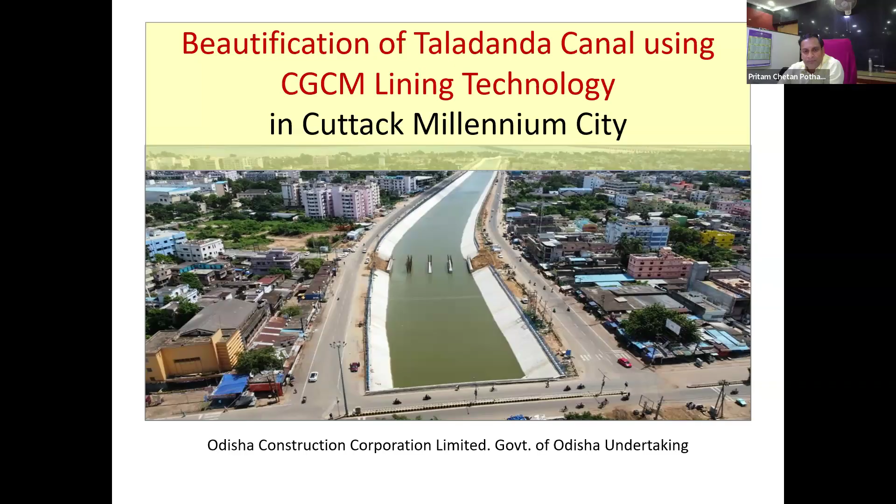First of all, Taladanda Canal. It was a very old canal constructed by the Britishers for their navigation purposes. Now navigation is no more used. So the canal is primarily used for irrigation facilities. Apart from irrigation, it gives industrial water supply to Paradip, which is located around 80 kilometers away from the Cuttack city. So all around the year, canal flow is there. So it was very tough to make a closure of the canal and construction activity in the center. So the technology's purpose was to complete the task within a record time.

Due to lack of maintenance, the old canal was filled with garbage as habitations developed in the city center, creating many hazards. The canal was looking shabby and unpleasant.

Besides, SCB government medical in Cuttack is Odisha's largest medical facility, which is adjacent to these canal sites. So all the medical waste and garbage from the city center ends up there. People have a habit of dumping into the canal.

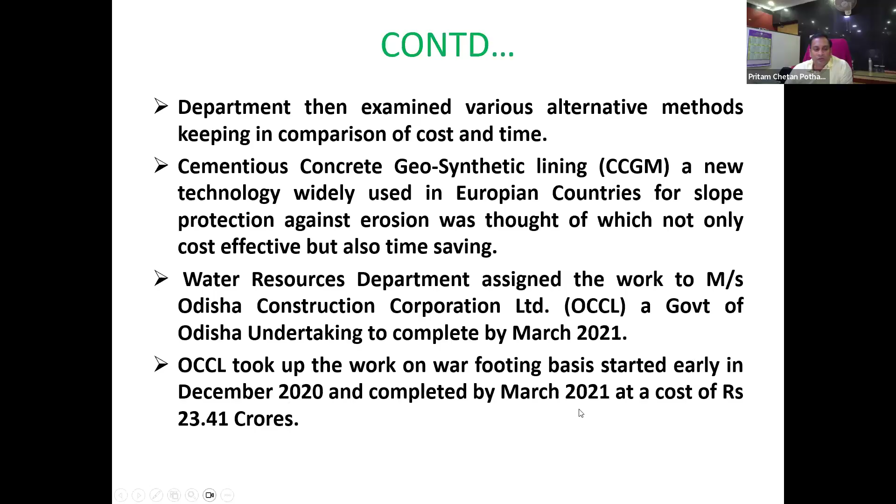Taladanda is the right canal. This is the Mahanadi river - from the Mahanadi river, the Taladanda canal originates from Jobra, Cuttack, then it goes up to Paradip, an 82 kilometer length canal.

Then we started the work - first, cleaning through multitasking efforts, because district administration also gave us full support. All the pipelines connected to the canal needed to be diverted - we had to divert the municipality waste pipelines.

We constructed some parallel drains along the canal side, then we closed all the pipes directly entering into the sewer.

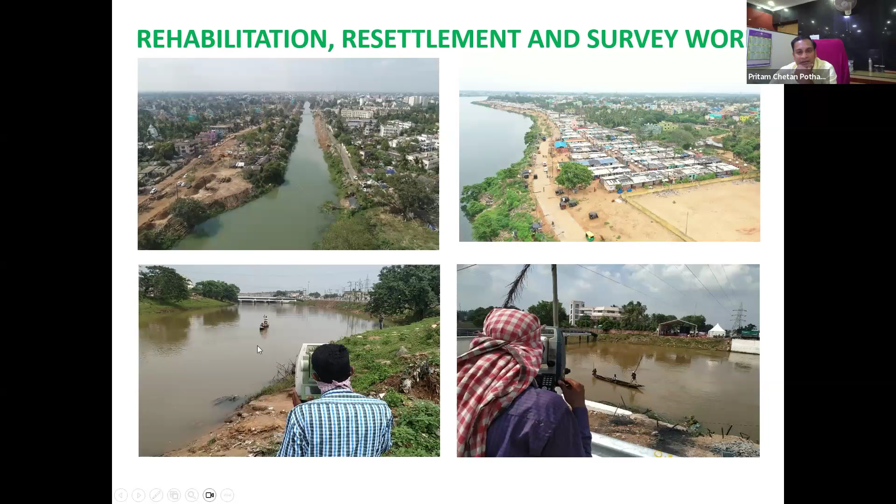I'll show afterwards. First of all, CGCM is simply a carpet of two layers of high strength woven geotextile. This is made up of polyester, internally connected at regular conjoint or intermittent filter points to release the pore water pressure.

Lining, it was why? Because CGCM is something I will show you in picture in details. This one has a regular interval. It has filter points where you can release the pore water pressure very easily, for use under hydraulic load, both longitudinal and vertical loads. It can be used in slopes as well as in beds. In both ways you can use it.

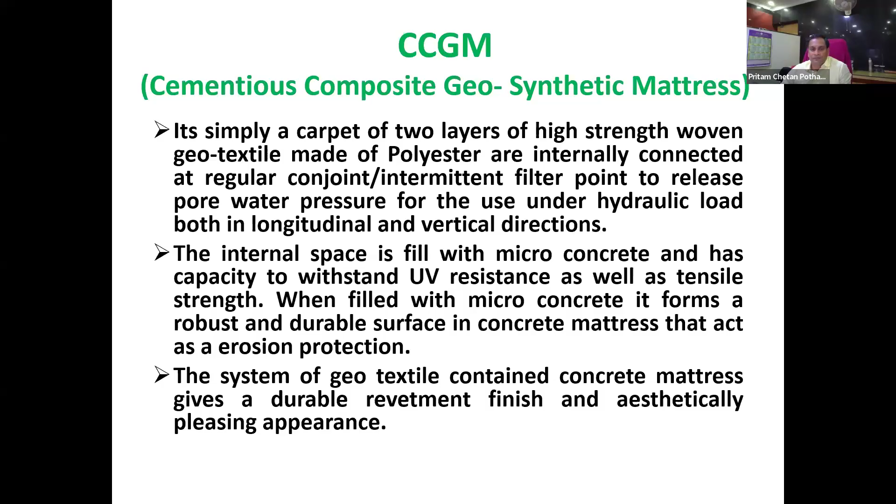So these are the technical properties. CGCM double woven layer polyester mattress, weight is 380 gram per meter square. It has tensile strength more than 50 kilonewton per meter. Pore size 200 micrometers. Average thickness after filling varies in the range of 100 mm to 120 mm.

That also we are using in the lining. Lining thickness, normal concrete thickness also we are providing up to 100 mm. So here also, thickness range varies from 100 to 120 mm depending on our requirement. Material size is available accordingly.

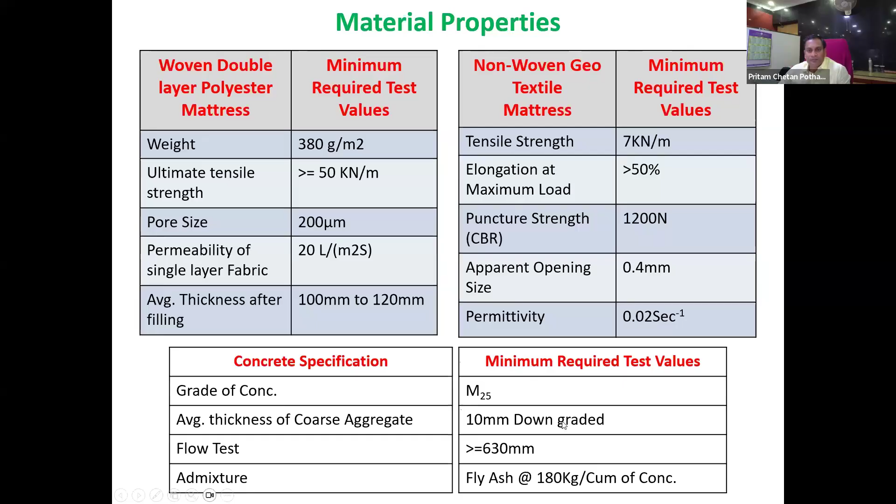Admixture we are using is fly ash as admixture. And this is the typical section, profile section. First of all, we did not take any lining work in the canal bed. We only took it in the slope portions, both sides slopes.

This is the CGCM, and this thickness varies from 100 to 120 mm thickness. Below the CGCM, we are providing 450 mm thick base preparation using sand moram admixture. This is laid over the normal slopes or slopes. Canal width is around 24 to 25 meters.

The main canal was very vast. So what we did first, we first prepared the slopes. After the slopes, we adopted sand moram admixture.

Sand moram, we took sand 60%, moram 40%, mixed that separately, and placed over the slope portion, and compacted through compact vibrator roller or compact plate. Both we used simultaneously.

This is the arc portion cutting. First we cut the section, making the profile section of the canal as per our design requirements. Then we placed sand moram admixture at 450 mm thickness. Then compacted properly using a compactor roller, slope particularly.

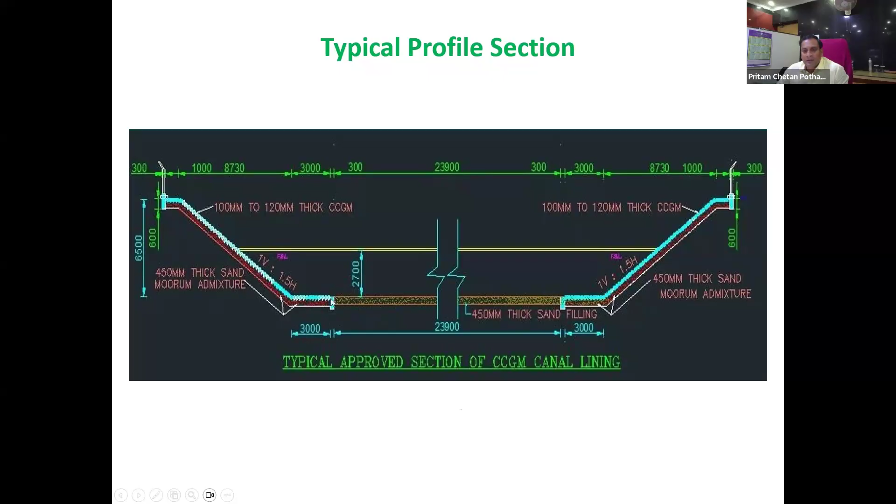We insert the CGCM on both sides of the canal, 3 meters from both sides. This is the key wall, and this is the toe wall. Both ends are fixed by concrete CC toe wall, that's why we constructed the CC toe wall.

And wherever bathing huts were required, we constructed them. These are some ancillary works we took up.

After preparation of slopes, we first applied this 150 GSM non-woven geosynthetic mattress, whose main aim is to protect the sand moram admixture, since the groundwater table is very high, by immediately applying the sand moram admixture.

We applied the non-woven geosynthetic mattress, over which we placed the woven CGCM material, because this material will not flow away. That's why we applied these 150 GSM geosynthetic materials. It is pervious material - only water will seep out, but no soil or sand particles will go away.

Over which we laid the geosynthetic CGC mattress, and we stitch it at the sides with a stitching machine as per our requirements. Both sides are pegged to hold the mattress firmly.

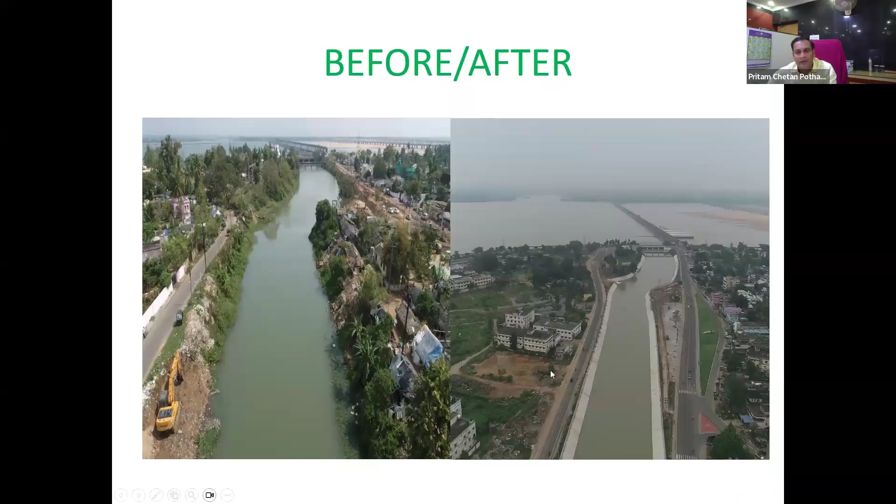This is the view before and after. Before, the canal was like this, and we made it like this, and it got huge success.

A major challenge in constructing this project was the eviction of encroachments, which was a vast task, and rehabilitating them through resettlement was also a major challenge. The second important challenge was utility shifting.

A lot of cabling in the city center was going through the underground canal banks, and shifting all these utilities was also a major task. We coordinated with all these stakeholders, and through joint mutual efforts we achieved this task.

Closing the drainage outlets of the municipality was another task, along with removal of garbage and vegetation and their disposal. As I told you, we threw away all this garbage 20 kilometers away.

The second major challenge was excessive seepage due to higher water table, since the barrage is located upstream of the canal, so the groundwater table is very high. To release the excess water pressure, we decided to use this technology, and to prevent the sliding of slopes during construction, because due to the high water table, slopes were frequently sliding.

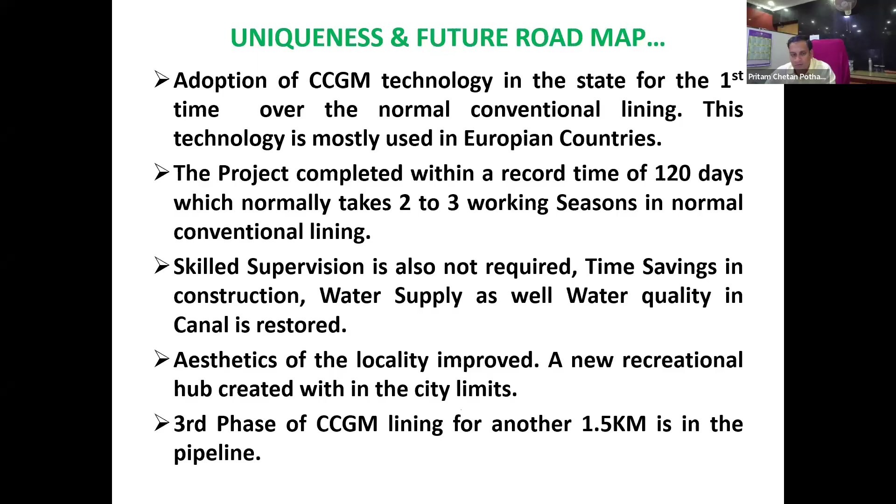This canal is just like this. So our secretary has told a very sensitive task. Even a difficult and sensitive task can be achieved by meticulous planning and stakeholders' confidence, because R&B did its job. They constructed parallel roads on both sides, 7 meter wide roads, to divert the traffic. It was a distant dream for the Cuttack users.

The canal itself we promoted for tourism, because tourism has already created a boating center in the canal. Never dreamed that in the canal one day boating will go on. That also was a success. So this is all about my topic.

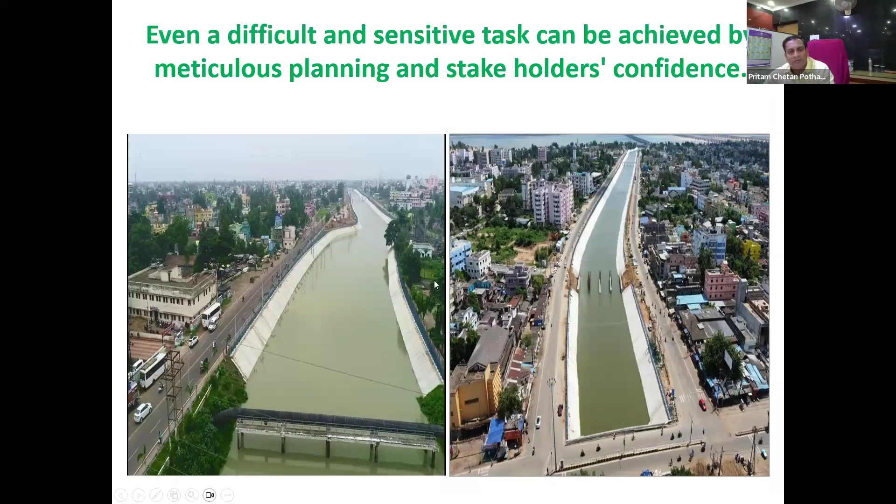I'd like to thank you. This is a small example, because normal conventional lining we are doing everywhere. With this technology you can do it in a very short span of time, and since canal closure is difficult to take all the time, this task was achieved using this technology only. Otherwise, in the normal conventional type, it would have been a much more time-taking process. I'd like to conclude. Thank you.

Any questions you can ask me, sir? Hello. Yes, yes. Hello. Yes, sir. So actually, your topic is totally completed. This is a small topic because it's a new technology, and another is your irrigation system. I think piping. Irrigation, sorry.

Now we can conduct the question session, because the session is from 6 to 7:30. So any doubts from our participants' side? This is a new topic also. They can discuss with our expert. Sir, good evening. Good evening. I am having certain questions. Can I ask right now? Yes, please.

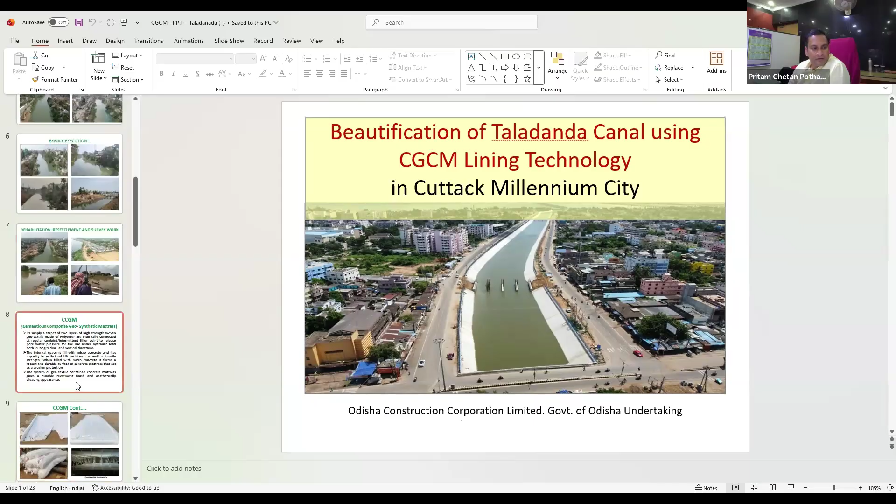You cannot compact it. Sir, what kind of super plasticizer is used in this concrete? I told you, super plasticizers. One minute. Admixture, we used fly ash. Super plasticizers as per the requirements, because we set up the plant near the side of the canal. So travel time was within 5 minutes.

Sir, but according to the European code of self-compacting concrete, super plasticizer is used according to the binder ratio of the concrete, that is 0.09 to 0.1, something in this ratio. So I just want to know what kind of super plasticizer is used in that particular kind of concrete, because it is a very new technique for us.

Actually, we also followed all the codal requirements of the concrete for self-compacting concrete. All varieties of super plasticizers are available in the market. As per the requirement, we are using it at the plant site, because it was easy for us to have supervision, since we set up the plant adjacent to the canal site so that our people can always monitor our requirements.

Exactly, I cannot tell you what kind of super plasticizers we are using, because a variety of super plasticizers are available in the market. But they are used as per the requirement, of course. The company name I cannot remember exactly. Sir, another question.

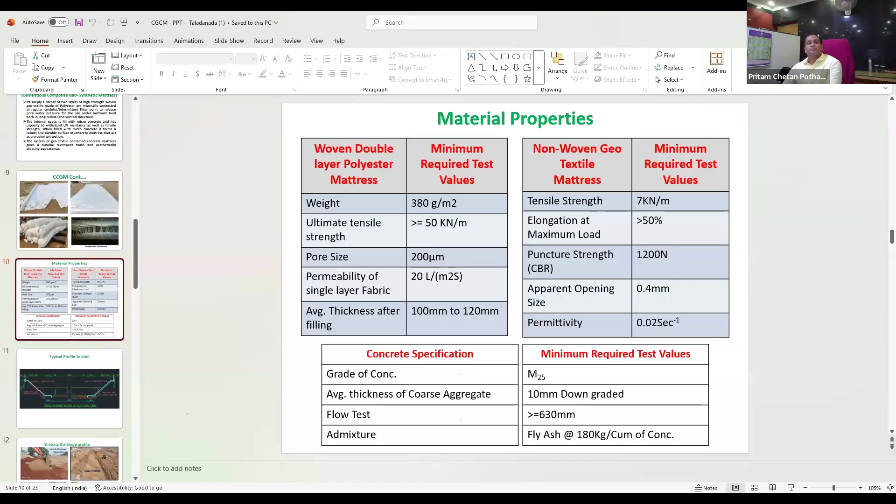Yes, please. Sir, is there any scope of controlled discharge, groundwater recharge? Groundwater recharge. Yes, sir. Here we did not require any groundwater recharge because groundwater is already high, since the water body was above the full supply level of the canal. So no need? In summer, sir, the water table actually goes down. No, no, in this region particularly the water table was already high because the barrage is there.

Ponding was done up to full FRL level. Okay, sir. FRL level is much higher than the FSL of the canal. So no need to do any groundwater recharge, but groundwater automatically comes through; pore water pressure releases. We have to release the pore water pressure. Okay, sir. Thank you.

Sir, I have another question. Yes, sir. Sir, the membrane used as a filter material, and another membrane also, I think, used to cast the concrete? No, sir, only one membrane used as a filter material. Two membranes, sir. One is non-woven material, which is called non-woven. First, that is called GSM.

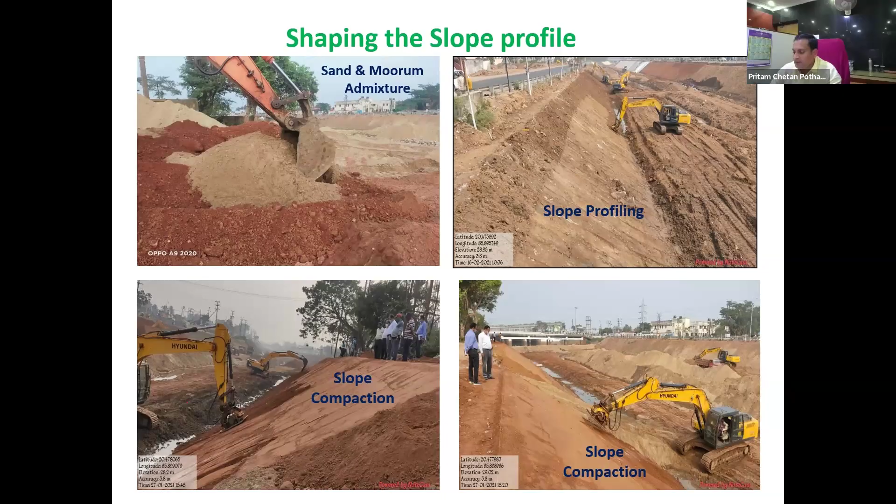Our aim was to prevent the slopes from flowing away. And the second layer, sir? Second layer was CGCM, over which we are placing concrete. That was here. This is GSM. We are applying over slopes after application of sand moorum admixture. We are putting this one.

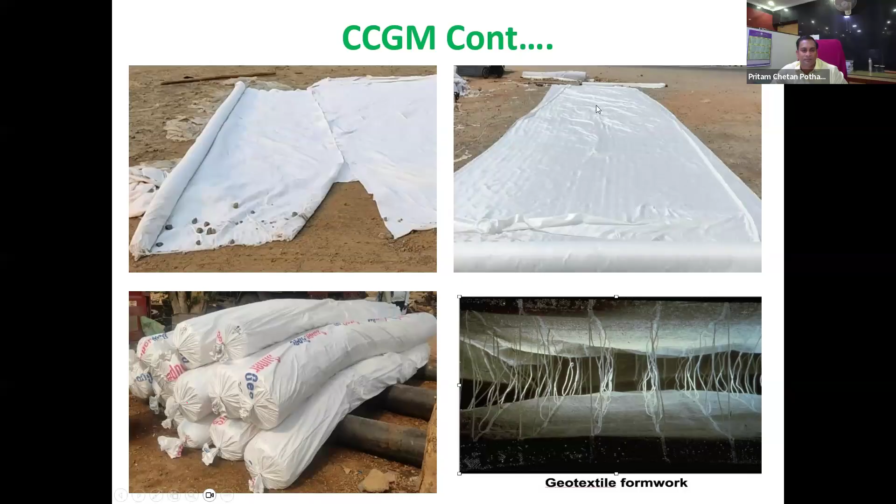Because whatever seepage water is coming, it can come out through this mattress. Over this, application of CGCM, this is double layer. And it has regular interval points over which concrete can flow from bottom to top. Yes, sir. Thank you, sir. This one, sir.

We are placing this GSM material first. Then over which we are placing CGCM. After that, through that CGCM, we are pumping concrete through that layer. So whatever water comes, it will first filter through this GSM. Sir, that means there is no curing required for this concrete?

We are doing the curing. For durability of the concrete, curing must be done. Sir, in which way? Because a membrane is also present at the top layer of the concrete. Yes, but the membrane on the top layer is fully covered with gunny bags, and water is applied continuously.

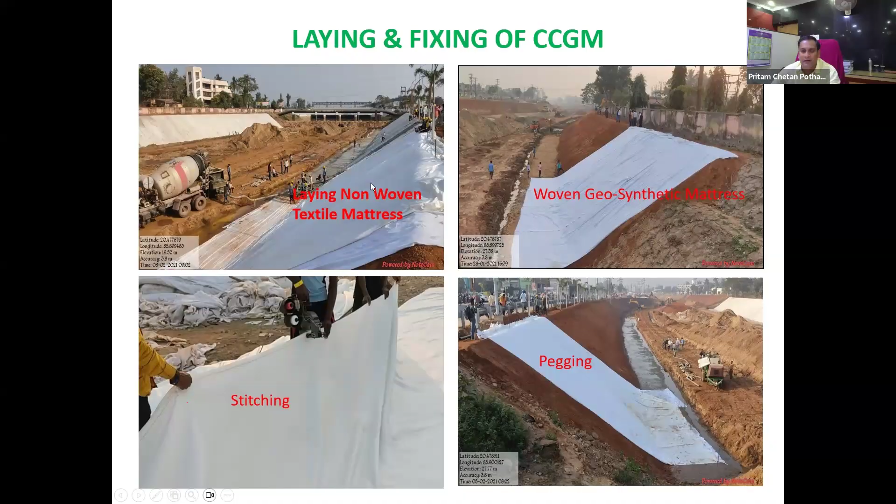But once the concrete enters inside, it appears like this. This is the construction stage. After the construction stage, it looks like this. If you apply water over this, it will penetrate through that layer, sir. Yes, sir. Thank you, sir.

Any other question? Hello, sir. Yes, sir. Hello. Sir, I have a doubt.

Sir, how long does the CGCM lining last? As per company specification, it can last minimum 25 years. Since we have adopted this technology for the first time, we can assess its lifespan after 25 years. Before that, I cannot say, because it is already in good condition.

But these regular intervals sometimes get filled up by sand. If any silt comes through the canal, it may get deposited, but through application of a pressure pipe it is released and washed away. Washing is done once every year to release any silt deposited in the pore spaces, because if it is deposited, water cannot be freely drained. So regular maintenance we have to do. Okay, sir. Thank you, sir.

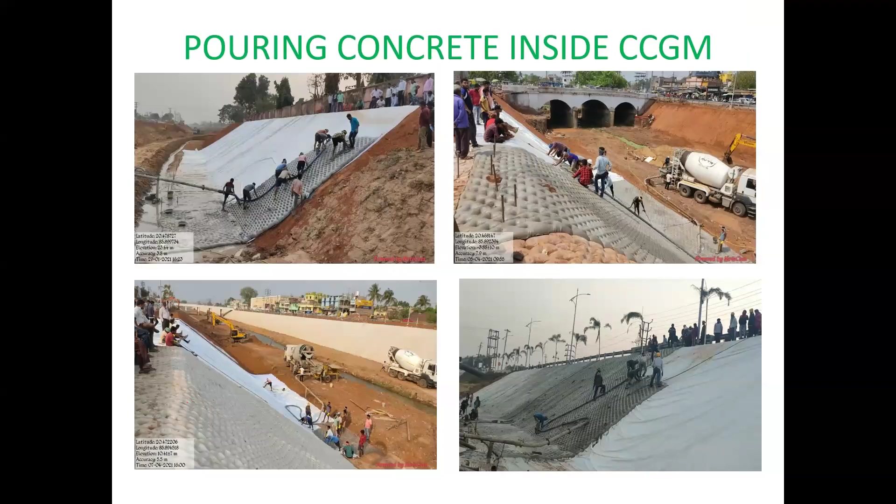So during heavy flood, high flood conditions, can such type of lining provided in the canal prevent the force due to high flood? Can it give any type of guarantee that there will be no separation at a particular junction in this canal? Particularly, sir, as we know, during high flood in Baleshwar, Bhadrak or Jajpur, some parts were broken and flood water entered into the city. So is there any chance during such flood conditions that it has an impact on this particular portion of the canal which is lined by these geosynthetic mattresses?

Sir, first of all, a canal is a controlled structure. We have a control structure in the head regulator. When there is a heavy flood, we close this canal system fully and allow the water to go into the river. So we do not allow the flood water to pass through the canal. Okay. Otherwise, once flood comes, it will be washed away. There is maximum chance, because flood has predominant velocity. It can do disaster to anything.

So since it is a controlled structure, during high flood we always try to close the head regulator of the canal system. We do not allow flood water to enter into the canal, because only up to the maximum FSD can we allow to pass through the canal. Now, if the flood water in the river moves over the FSL, the full supply level of the river, then that will enter into the canal.

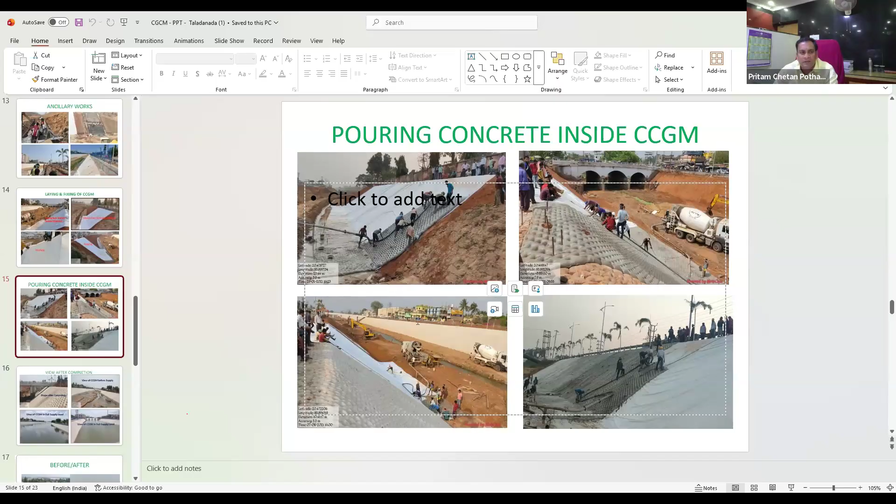Not necessarily every year, but at least every 2 to 3 years we have to do regular routine maintenance. Otherwise, grass will fill up everywhere. In this figure you can see, the last one, at some intervals it is looking green because it is filled with grass. So that needs to be cleaned at regular intervals. Otherwise, it looks something different.

What is the difference in cost? Between conventional lining and CCGM lining, the cost is 2 times per meter length. But the cost can be reduced if this product is widely available and the monopoly goes away, because one company is selling the product. If it is locally available, then more competitors will come out and the cost can reduce further.

As you are associated with these works, you better know the cost per meter length of conventional lining and of this geosynthetic mattress. What is the cost for 1 meter length? Actually, cost depends upon the materials. First of all, we use GSM materials. 150 GSM per square meter rate is around 85 rupees.

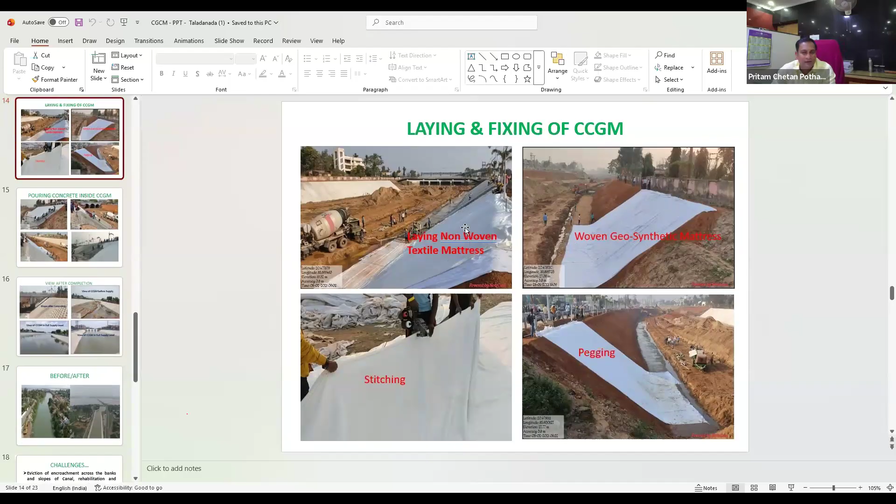GSM is widely used, that's why the rate is very less. CCGM is not widely used. It is manufactured in Germany and supplied in rolled packs like this. With transportation, it costs us around 1500 per square meter for CCGM. Then self-compacting concrete costs around 7,000 per square meter.

Inside, this is geotextile. Both are interconnected by these textiles, and they have some tensile strength. It can bear certain tensile strength.

What other conventional methods are used for canal lining instead of this? Normal concrete lining is the conventional lining we are using, with pressure release valves. In conventional concrete lining we use M15 grade concrete, and thickness varies depending upon the discharge of the canal.

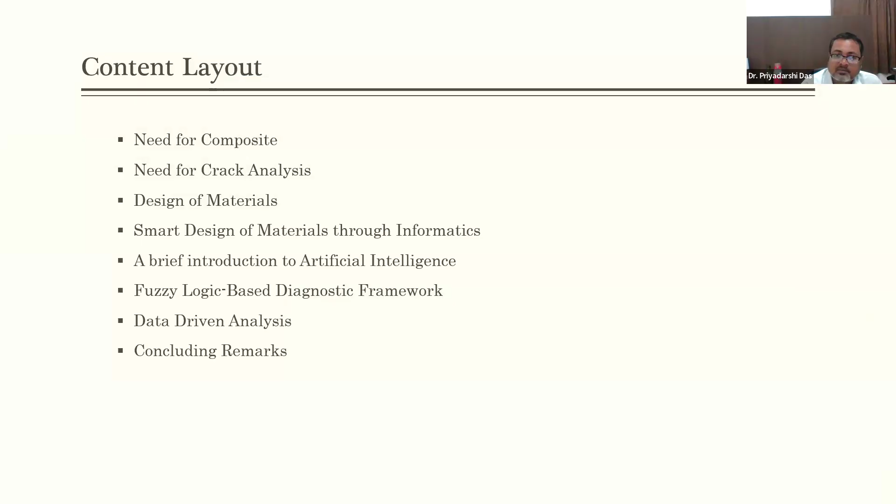Continuing this presentation, these are my content layout: once again the need for composite and how cracks affect the structure, then the design of materials, and through material informatics we'll find how the material is suitable for analysis, what artificial intelligence techniques and fuzzy logic-based diagnostic framework are used, what data is involved, and finally summarizing and concluding everything.

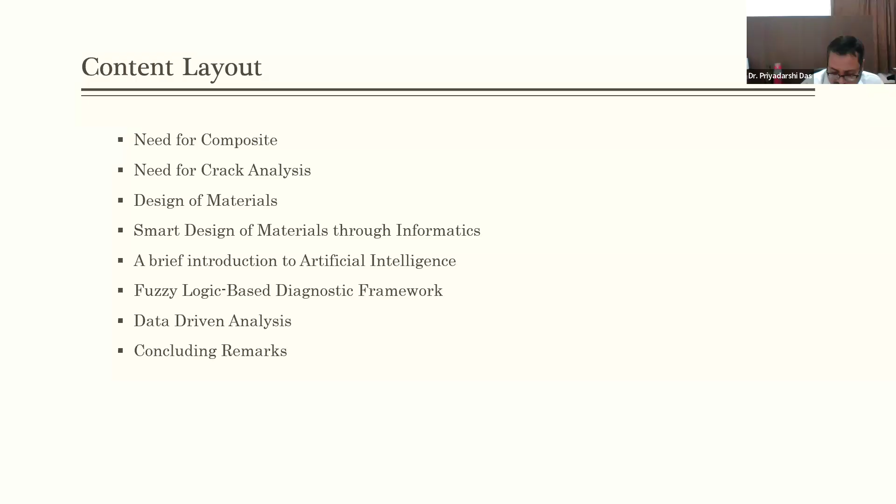Importance of composite laminates: we already know these have high strength-to-weight ratio and high stiffness-to-weight ratio. The ability to tailor the composite to different shapes enables engineers to apply it in different engineering fields.

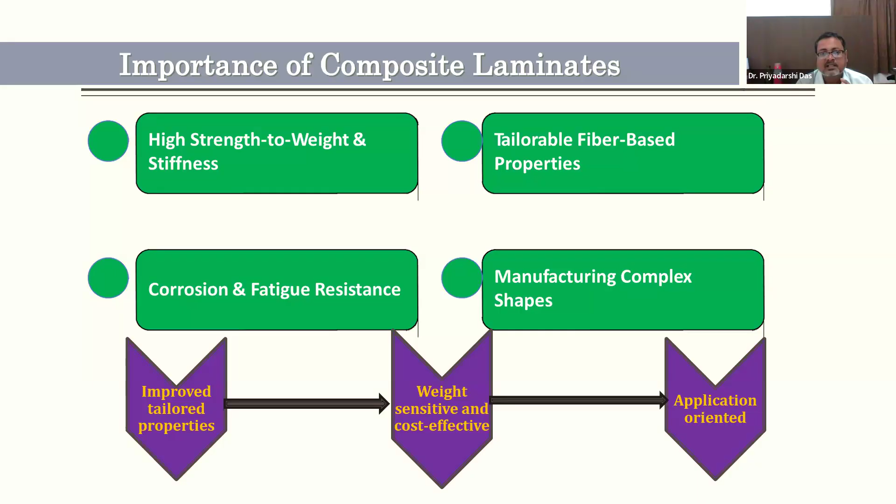Laminated composite can be shaped into beams, into different forms of plates, and into shell structures. Conveniently, it can be applied through different engineering applications, enabling improved tailored properties, which translates to weight-sensitive and cost-effective material. Since it is tailorable and weight sensitive, it can be applied through different engineering fields, so composite laminates carry a lot of importance in such fields.

Laminated composites, as we discussed yesterday, have two phases: fiber phase and matrix phase, where fiber predominantly transports the load and matrix predominantly distributes the stresses between the fibers, thus protecting the fibers from environmental loading conditions.

When fabricating a laminate, it should be fabricated maintaining the pressure and room temperature so that the bond between the layers is uniform. Maintaining uniformity between the bond of the laminates is very important.

Now the concept of structural health monitoring: if a structure is designed for a particular period, then for that period it encounters different kinds of loading conditions, from environmental loading to static and dynamic loading conditions. Under that repeated action of load, how the structure behaves through the ages needs to be identified.

Because if you don't identify the structure's health, crack initiation may propagate throughout the structure and ultimately failure will happen. So structural health monitoring is an important aspect for designing the structure. Nowadays, structural health monitoring is an essential part for every built-up structure.

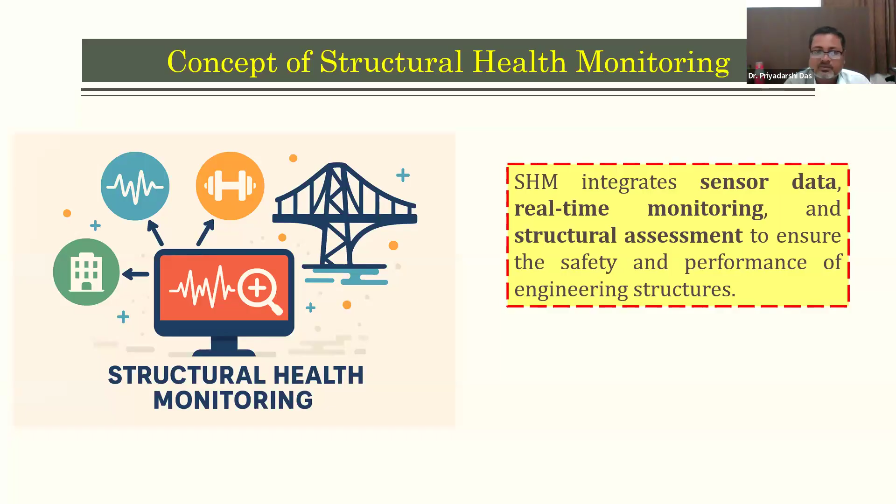In structural health monitoring of laminated composites, since they always consist of hidden internal damages like delamination or cracks between two fibers, if the matrix-to-fiber bond is somehow inadequate, the matrix detaches from the fibers. At that point delamination happens, and through repeated action of load, cracks are always formed. The structure is susceptible to cracks or disintegration through repeated environmental load conditions.

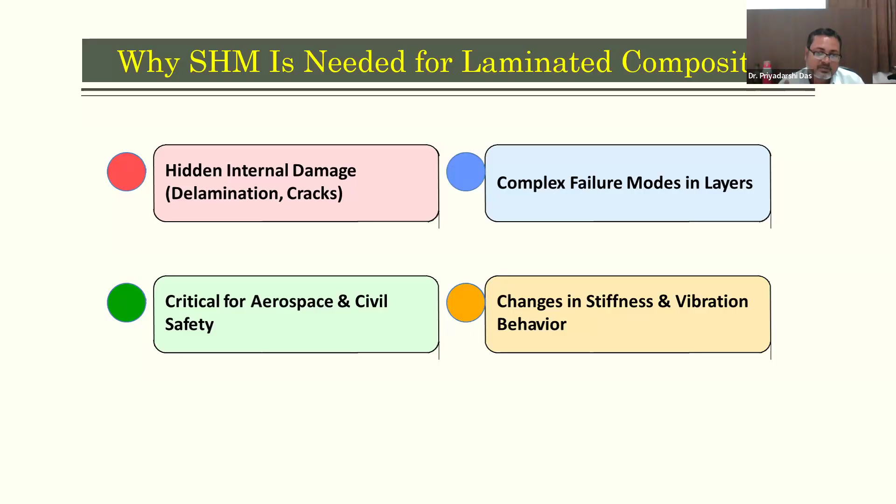Laminated composites have very complex failure modes due to their orthotropy. The orthotropic properties present complex failure modes in layers, with each layer susceptible to failures, meaning intra-ply failure or inter-ply failure can happen. Due to its wide applicability in structural applications like aerospace, civil engineering, mechanical, and agricultural fields, it carries a lot of importance for structural health monitoring. Whenever structural disintegration happens, the stiffness of the structure reduces, and thus it affects the vibration behavior.

So by research attention towards the vibration analysis or crack detection technique in laminated composites, as you can see from the reputed literature, those who have meticulously addressed the vibration based crack detection technique, we can see that modal curvature or wavelet based method is 25%, strain energy or compliance is 20%, ultrasonic and different non-destructive testing techniques is 20%, and very little is AI integrated. AI is quite new to laminated composites, though it has been implemented in different structural applications, but AI integrated crack detection technique specifically in laminated composite beams has not attained much wider field.

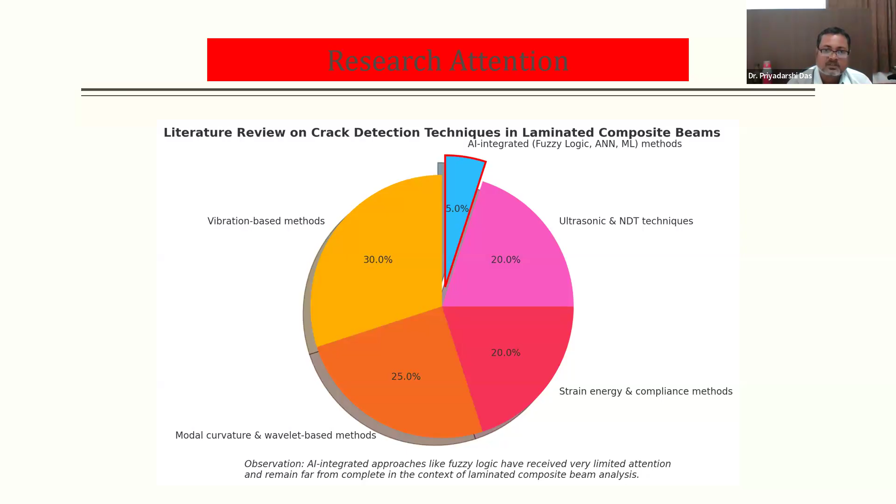That means if I'm saying the AI integrated field, that's fuzzy logic, artificial neural network, that is ANN or machine learning. For machine learning, it requires a huge number of data, so with a small amount of data, it cannot generate a robust model. For those things, fuzzy logic received wide attention because whatever data we are inputting, that data can be amplified through rule-based methods. So we can say from this research attention that the AI-based technique used for crack detection or damage detection in laminated composite beams or composite structures is far from complete. It has to gain a lot of attention.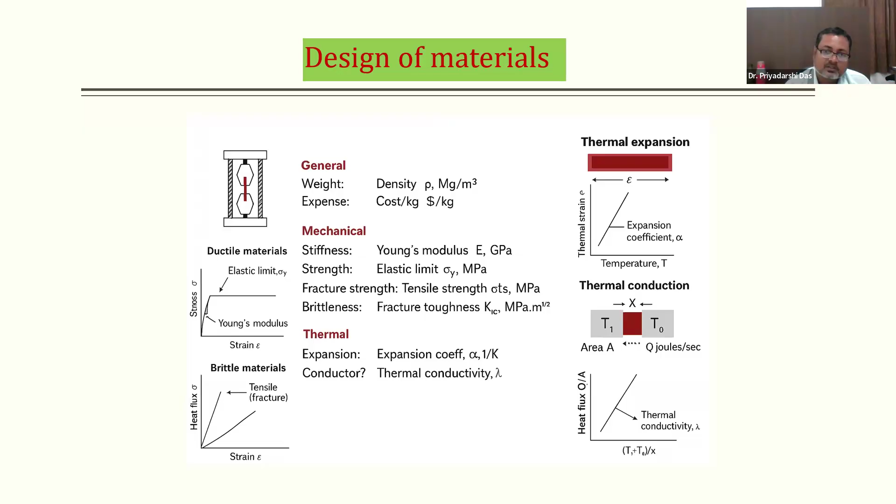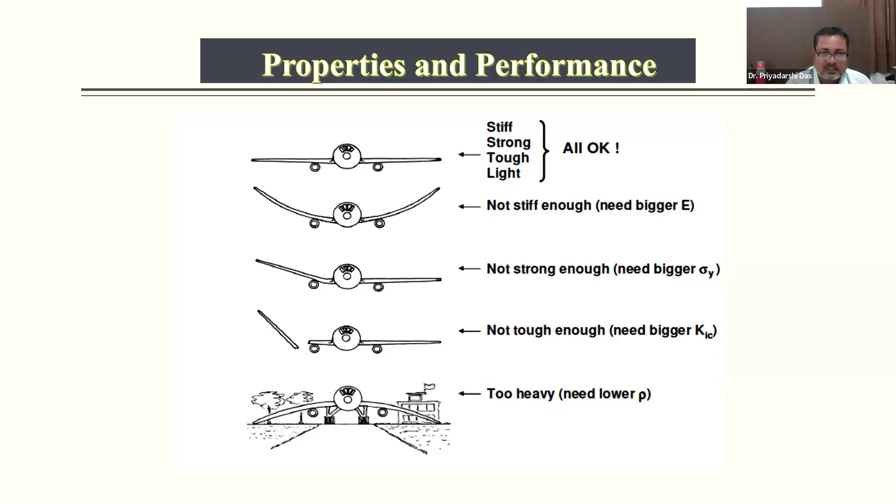Explaining this, suppose we are having an aircraft wing. If it is not adequate for its stiffness, strength, toughness, and weight, it will break. That means the properties and performance of the aircraft wing depend on the balanced design of its stiffness, strength, toughness, weight, and also its fracture index. If it is not addressed properly, it will break.

The smart design of materials through material informatics, that is material innovation infrastructure, integrates computational tools, experimental tools, and digital data, and that will help find the suitable material that will essentially serve for human welfare. That material, as a building material or construction material or structural member, can serve human welfare, clean energy, national security, and the next generation workforce.

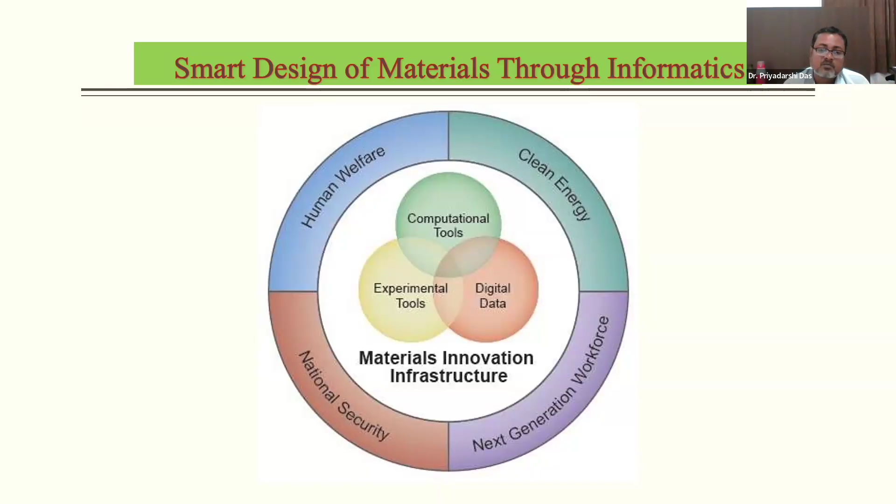The informatics based design integrates the data, correlated data, then theory, and it must be knowledge based. The data acquisition comes from experimentation or literature or numerical analysis or design of materials, then correlation with the physical concept of the system, then theory, that is informatics based materials design. So, how the material is designed and how it is compared for performance based design. This informatics based design enables the engineer, enables the designer, to use composite material for structural applications by comparing its performance based design.

A brief introduction to artificial intelligence. Artificial intelligence nowadays is gaining a lot of popularity towards structural application. Different artificial intelligence techniques are there: machine learning, which is widely used, search algorithms, and other techniques. In machine learning we have artificial neural network (ANN), deep learning, principal component analysis, Bayesian model averaging, support vector machine, and random forest. Then for search algorithm, by optimization method, we get genetic algorithm, genetic programming, and other techniques we are using fuzzy logic.

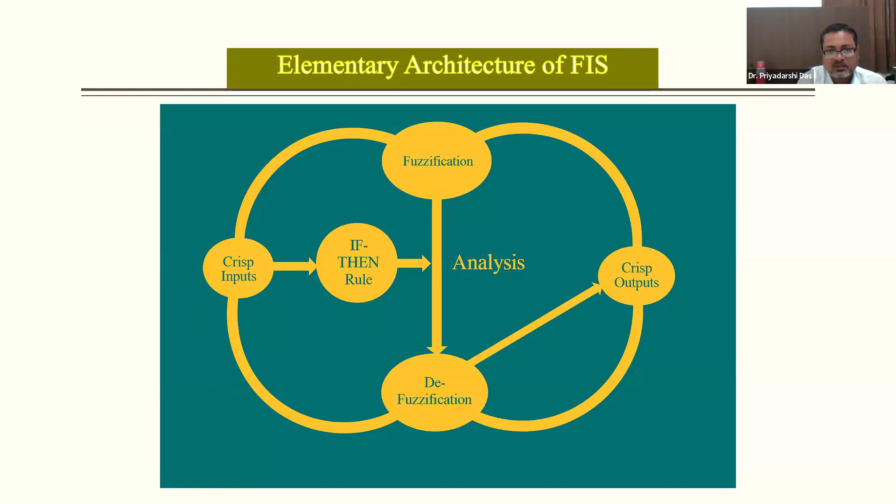Out of hundreds of values, it will give one value, which more closely resembles the numerical modeling or experimental analysis. We'll discuss it further. So fuzzy logic for crack detection, that is the soft computing application towards crack detection, can provide significant information and knowledge.

The application of fuzzy sets offers a significant and relatively newer modeling and reasoning pattern in the framework of uncertainty. That means in the fuzzy inference system, if the input values are very uncertain or noisy, it is independent of that uncertainty and noisy values. We may get the value for the frequency in a very noisy environment, and that noisy environment may tamper the frequency approaches.

Sometimes when you are getting the frequency through the modal analysis, the leakage of the signal or the aliasing effect of the signal may distort the frequency values. Even if we provide those distorted frequency values, it is independent of them. So the fuzzy logic is capable of analyzing uncertain and noisy patterns.

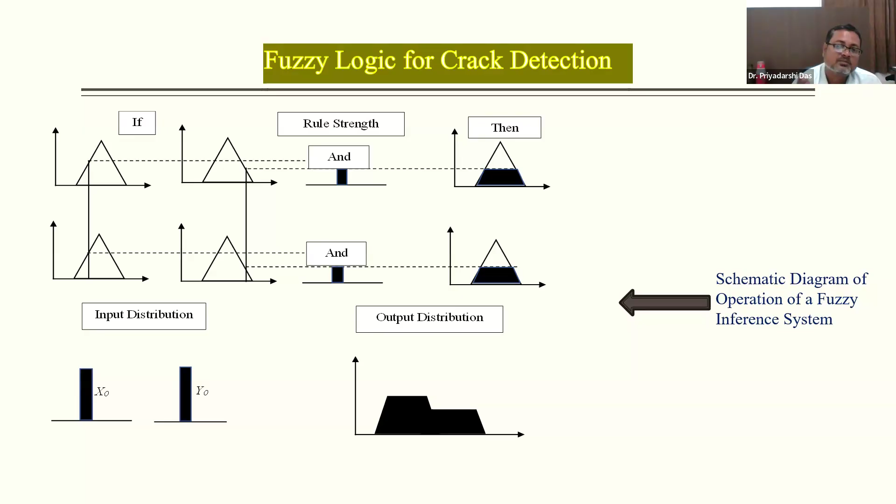The more the number of rules, the more crisp will be the output distribution. Crisp input means the number of inputs you can put, but the rule strength must be higher. The rule strength is so high that the output distribution will be much crispier and much closer to the experimental analysis. So in this way, this is the mathematics and the logical reasoning by which the fuzzy membership works.

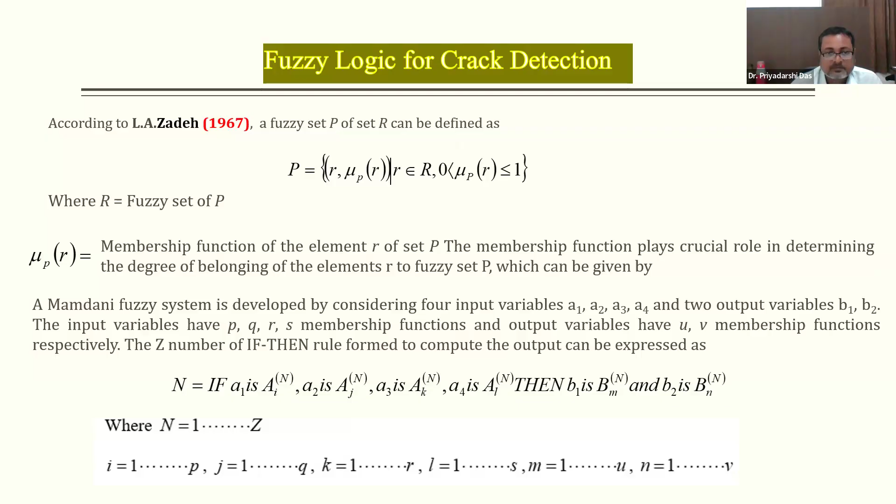So according to L.A. Zadeh, the fuzzy set P of set R can be defined as this. So this is the core concept of the fuzzy logic inference system, or FIS. The inputs are extracted features including crack width, length, depth estimates, and texture intensity measured from the processed images. So here, for a presentation approach, images can be analyzed through the fuzzy logic.

The fuzzy processing includes the membership functions that classify numeric features into linguistic variables. Linguistic variables are the most important thing, because you have to define the linguistic variables for the rules: if the position is nearer, what should be the value for that, or what is the severity of that crack, high or low. And the output values give precise crack presence detection, location mapping, and severity estimation for the structural assessment and maintenance plan. So depending upon the crisp inputs, the outputs will be generated.

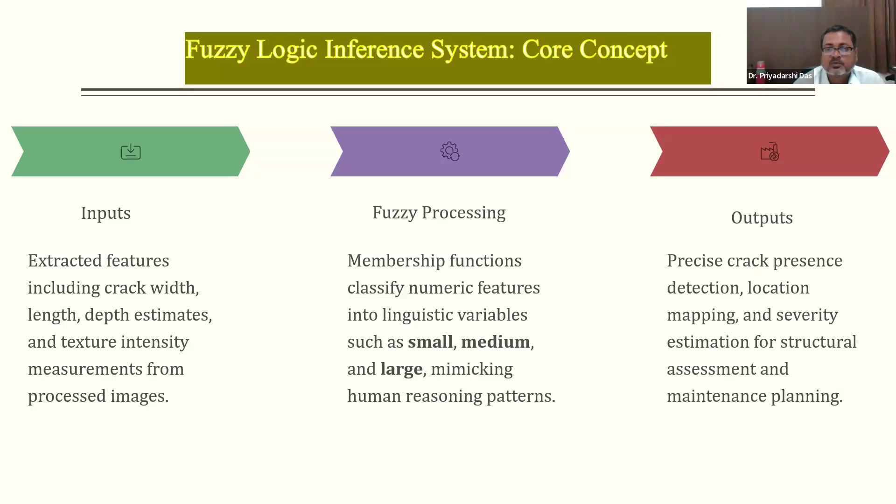And between that input and output, the rule strength must be so high that it will generate the crisp outputs in the form of crack detection, location or position of the crack, and severity of the crack. The fuzzy inference system bridges the gap between raw numerical data and meaningful structural health assessment by handling uncertainty inherent in real-world crack detection. So whatever raw data we have is processed through fuzzy processing, and the outputs will be crisp outputs.

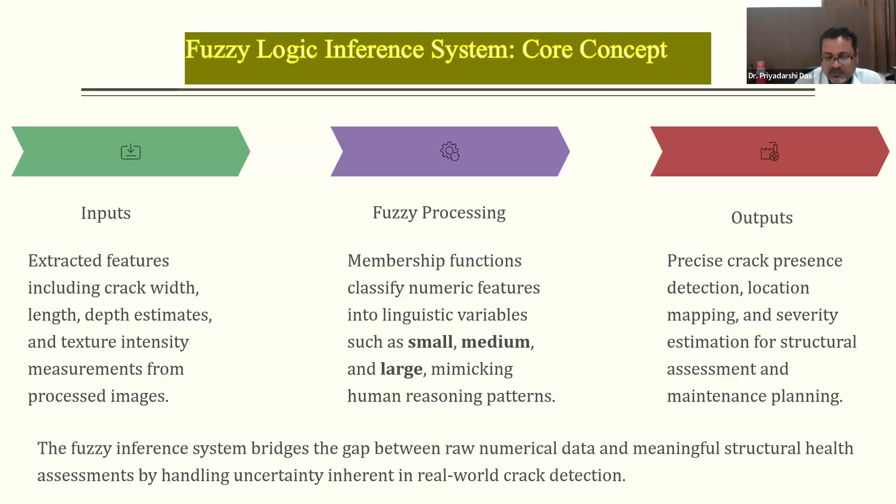So how does the simulation process work? The fuzzification step converts the crisp numerical inputs to fuzzy sets. The crisp numerical inputs are such as measured crack depth, vibration frequencies, buckling results, critical buckling loads, nonlinear analysis, and nonlinear vibration frequencies. So instead of treating a value as strictly high or low, the fuzzification assigns degrees of membership.

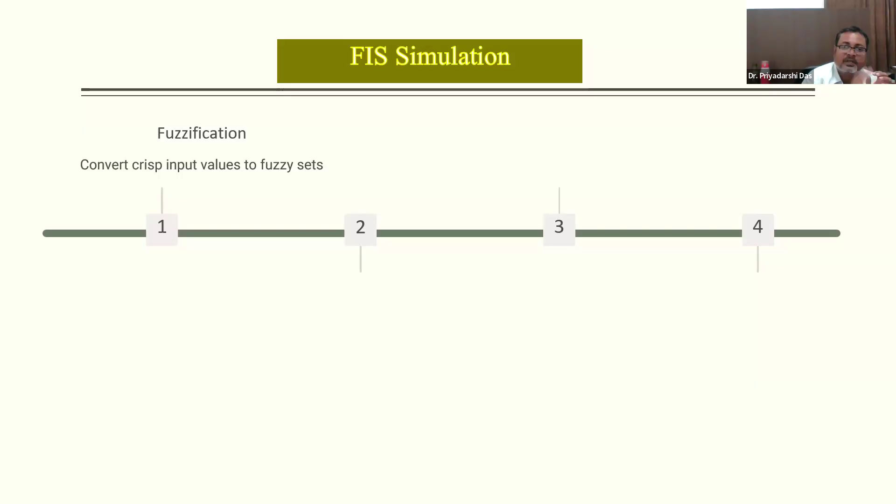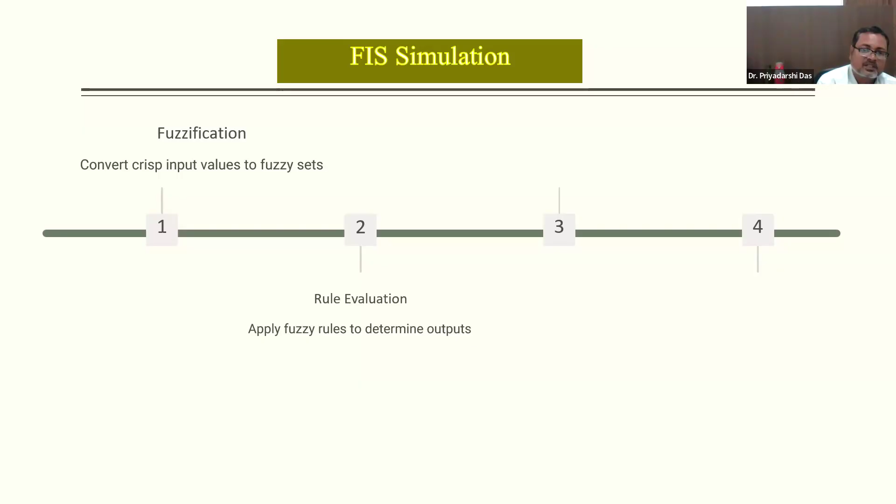So in rule evaluation, the system applies the if-then rule. If this frequency drop is high, then the location should be nearer, or the severity must be higher. Aggregation is combining the results from all active rules. So we have to write the rules for that if-then rule, and it will combine all those rules to produce a single entity. So every rule is producing an active result.

Suppose I am writing 1000 rules. So 1000 rules will produce 1000 active results. It will combine all those 1000 active results to produce one single result. So it will be more crisp or more profound, and that's why it will give a robust answer for the crack detection. Then defuzzification will generate the crisp crack decision output. So based on all that input data, the FIS simulation will provide a robust technique capable of detecting cracks inside the structure or on the surface of the structure.

So if the fuzzified inputs provide 1000 rules for 1000 results, those 1000 results on defuzzification will give one crisp output about the location and the depth of the crack on the surface or inside the structural element. That's why the fuzzy inference engine excels in handling ambiguity in crack detection, processing uncertain inputs through human-like reasoning to produce reliable structural assessments. So even with values presented in the most noisy or ambiguous ways, the fuzzy inference simulation will enable us to find a more crisp output, and that needs to be verified through the experimental analysis.

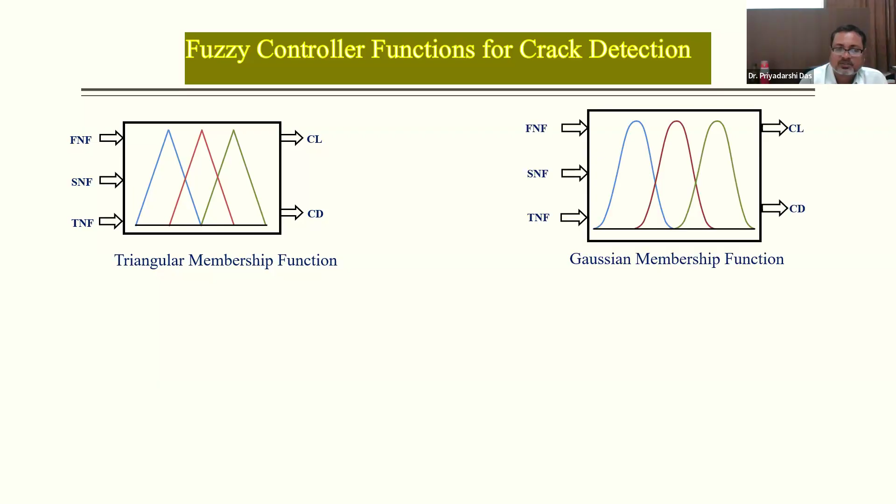So different membership functions are there. This first one is the triangular membership function. This is the Gaussian membership function. It will give a more robust value than the triangular membership function. So whatever membership function we are choosing, through that membership function we got the output result.

Now this is the hybrid membership function. In the hybrid membership function, both the triangular and Gaussian membership functions are used. So, hybridized. For the same first natural frequency, compared to the output through the triangular membership function, through the hybrid membership function it will be more crisp. That means if I'm comparing these three figures for triangular, Gaussian and hybrid membership functions, hybrid will provide the closest value to reality, or a more crisp value for that fuzzy analysis.

Whatever value the triangular membership function gives, the Gaussian membership function will give a more crisp value. And combining these two will get a value closer to reality. So if the surface crack is closer to the end support, through the hybrid membership function we can find a value that is closer to the end reactions.

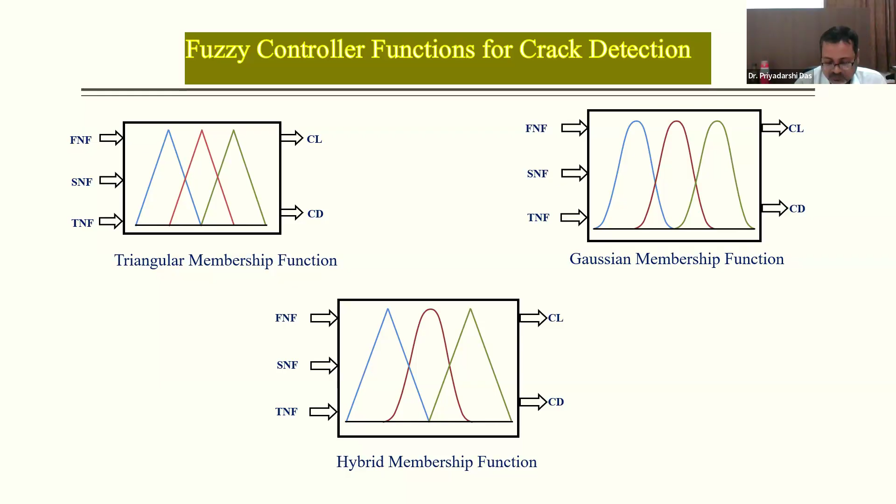So how do we translate the numbers into linguistic terms? Linguistic terms are very important. The linguistic terms can be classified as low, medium, high. So how can this be measured? For small cracks, 0 to 2 mm width, it is low severity. For medium cracks, 1.5 to 4 mm width, we can term it a moderate or medium concern. For large cracks, 3 mm plus, it is high priority.

So that means if through fuzzy logic we found that the depth or width of the crack is 0 to 2 mm, the functionality of the structure is intact. It needs a little attention to that region only. For medium cracks, maybe a small portion of that part can be rehabilitated or reformed. With large cracks, we can be sure that the structure cannot be used to its full potential and it needs to be replaced.

So these are the fuzzy membership functions for vibration analysis. This is the triangular membership function. It is generated through the MATLAB platform. There is a window in MATLAB to analyze or employ fuzzy logic applications. Through that MATLAB platform, it has been generated. So this is triangular.

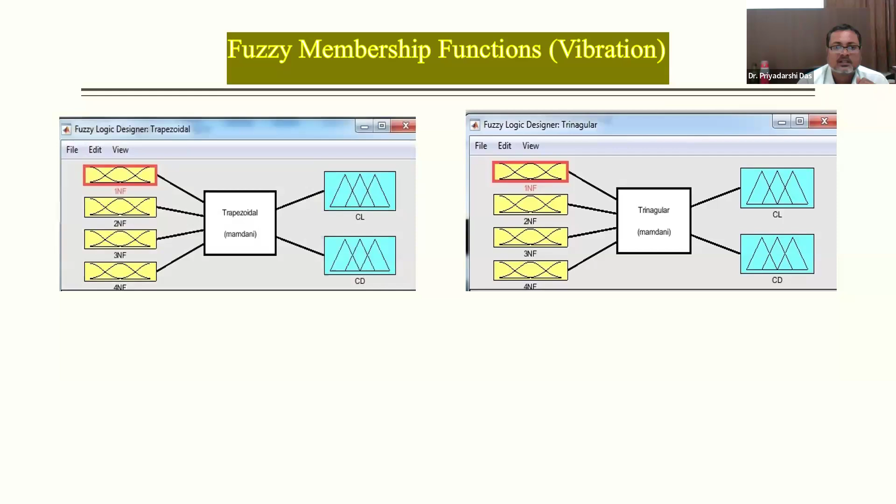So here it is clearly visible that we have input the four natural frequencies: first, second, third, and fourth natural frequency. All four natural frequencies are provided as the crisp input to all the Mamdani FIS, be it triangular, trapezoidal, Gaussian or hybrid.

Through the FIS simulation that we have discussed earlier, after defuzzification, it gives the result as crack location and crack depth. So whatever crack location we got for triangular, it will be more crisp for trapezoidal, then Gaussian. Then after hybridization, we got a more crisp value, closer to the numerical or experimental values.

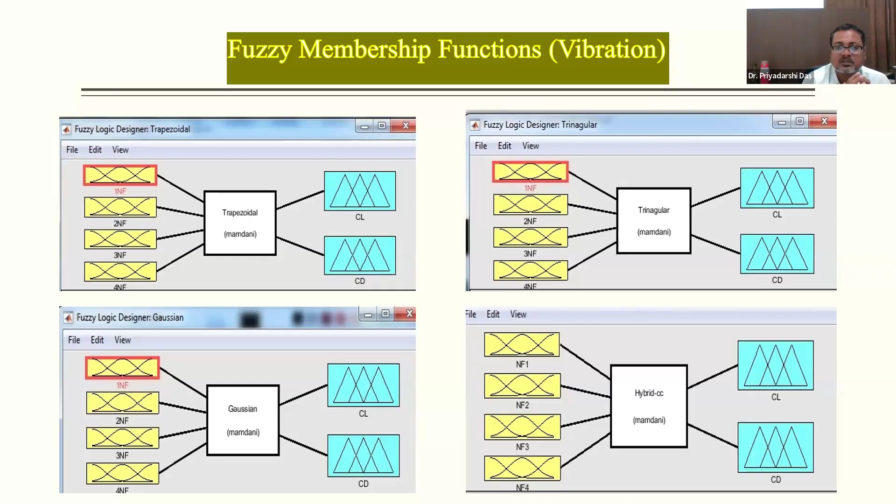In the same way, the buckling analysis was also done. For the 4 modes of buckling, that is buckling load 1, buckling load 2, buckling load 3, and buckling load 4, through the Mamdani analysis, triangular, trapezoidal, Gaussian, and hybrid, we got the values.

So this is the linguistic variable for vibration. The linguistic term in the first column is VVS, that means very, very small. The linguistic variables are first natural frequency, second natural frequency, third natural frequency, then fourth natural frequency. So VBS means very, very small value of first, second, third, and fourth mode of natural

frequencies. Then the linguistic variable VS, that is very small value for the first, second, third, and fourth natural frequencies. Then S equal to small value of first, second, third, fourth natural frequency. So in this way, we are going to evaluate the natural frequencies as the input values, and what the output values are. So from very, very small to very, very low.

So we got the input values. So what are the output values? That is VVC, very, very close value of crack location and crack depth. Suppose we are calculating for the cantilever beam where one end is fixed, another end is free. If the crack position is nearer to the support, the frequency drop is quite high. So through that linguistic variable, VVC means very, very close value of crack location.

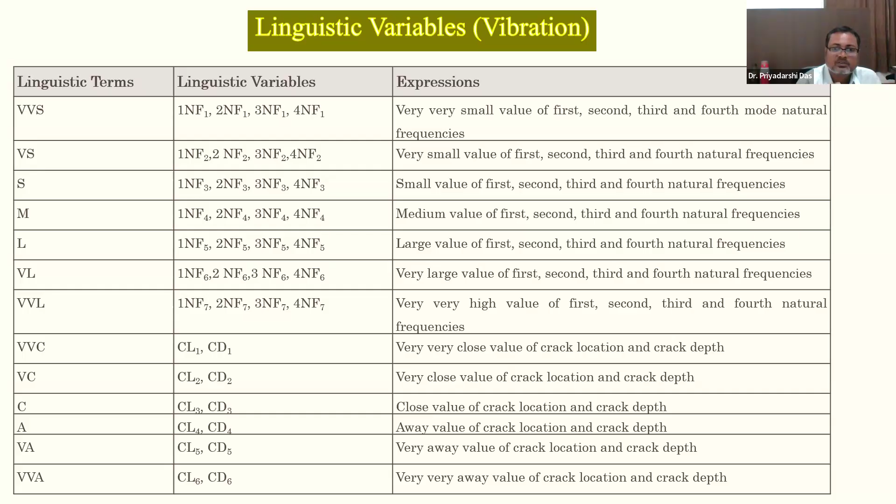Those linguistic terms can be changed. I have taken these terms as they are more suitable for human thinking. So the linguistic variables can be changed. Somebody can take very, very small or very, very low, VVL, and write very, very low values of the first, second, third, and fourth natural frequency. VVM, somebody can write very, very minimum value, very, very maximum value. So provide a pattern which is very general to human thinking.

The same way for buckling forces is also written. So VVS, that is very, very small value for first, second, third, and fourth mode of buckling. Very small value of first, second, third, and fourth mode of buckling loads. Then VL equal to very large. So similarly, we are getting the output values CL and CD, that is crack location and crack depth.

Actually, crack detection using buckling variables has not been published yet. We are the first authors to publish those values. We have been working on it for a very long time, and I have recently published 3 to 4 papers regarding linguistic variables for buckling analysis and crack detection using the buckling responses. You can find many results regarding crack detection using frequency responses, but there was no literature or study that presents crack detection using buckling responses.

So the buckling responses are clearly structured here, and all the structured values govern the crisp outputs. So the rule-based reasoning enables intelligent crack assessment by combining multiple features. Rule 1, that is high severity detection: if the crack width is large and texture intensity is high, then the crack severity is high. So like this, we can write the rule.

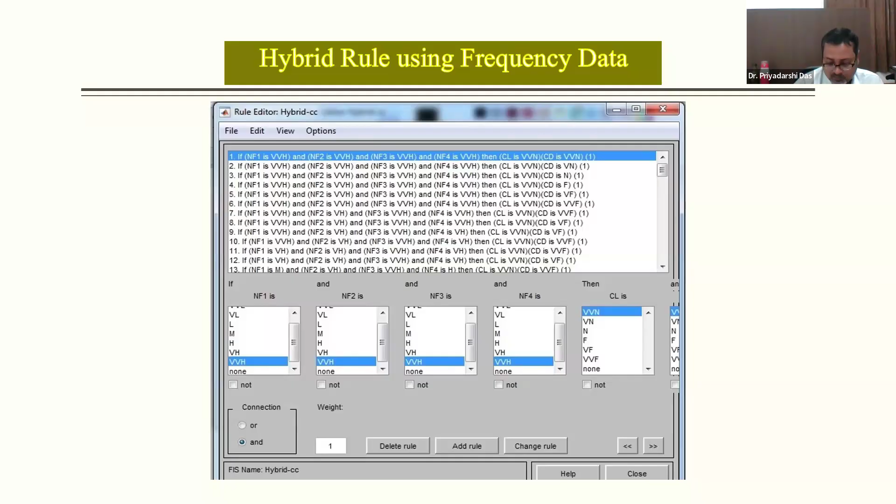In the second rule, we can write buckling load 1 is very, very low, buckling 2 is very, very low, buckling 3 is very, very low, buckling 4 is very, very low, then crack location is very, very near, crack depth is very near. Then in the same way we can produce crack depth as very near, far, very, very far, not found, none. Then again, if buckling load 1 is very, very low, buckling 2 and buckling load 4 also very, very low, then crack location is very near and crack depth is very, very near. So we are changing the crack location values from very, very near to very near, far, very far, like this.

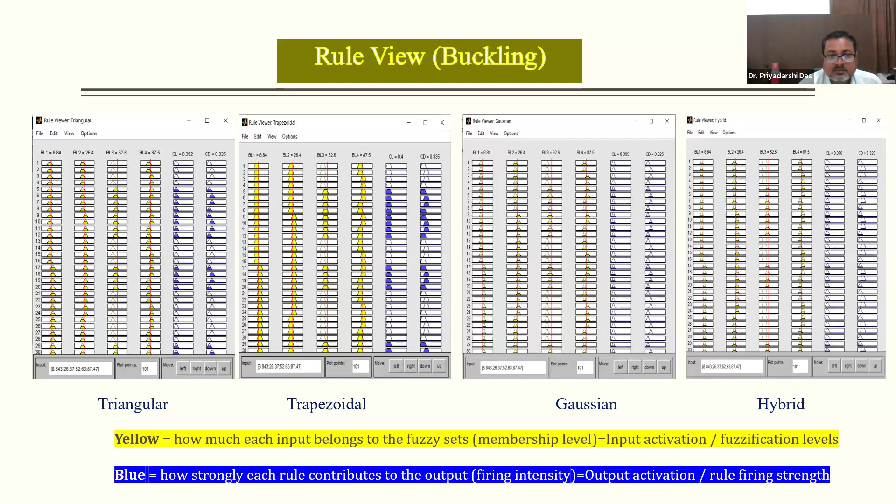Now this is the developed FIS, which is validated against Jena et al.. They used neural network, and we have used fuzzy logic. So we compared the relative crack depth and relative crack location through neural network and through the present hybrid Mamdani fuzzy inference system. We got very little deviation - for RCD at the first natural frequency, relative natural frequency, RCD got 0.39%, RCL also 0.39%. So within 1% we got all those values, meaning we have developed a very robust value that can produce the same result as the neural network.

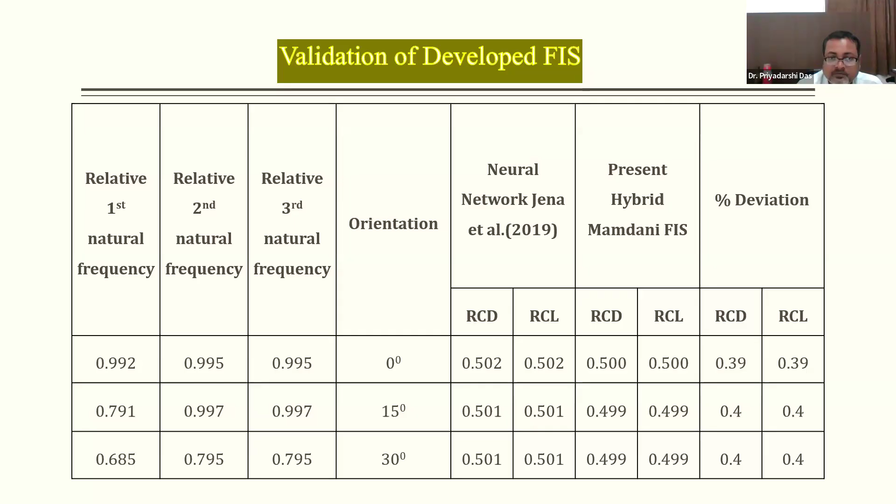So this is the fuzzy inference process for vibration. We have provided the value - you can see in the red highlights that for the first frame it is the first natural frequency, for the second frame it has taken the second natural frequency, for the third frame it is the third natural frequency, and for the fourth frame it is the fourth natural frequency.

After the defuzzification, the output given is the crack location, highlighted in the last two figures - crack location and crack depth. So the crisp inputs that pass through the fuzzy logic application give outputs of crack location and crack depth.

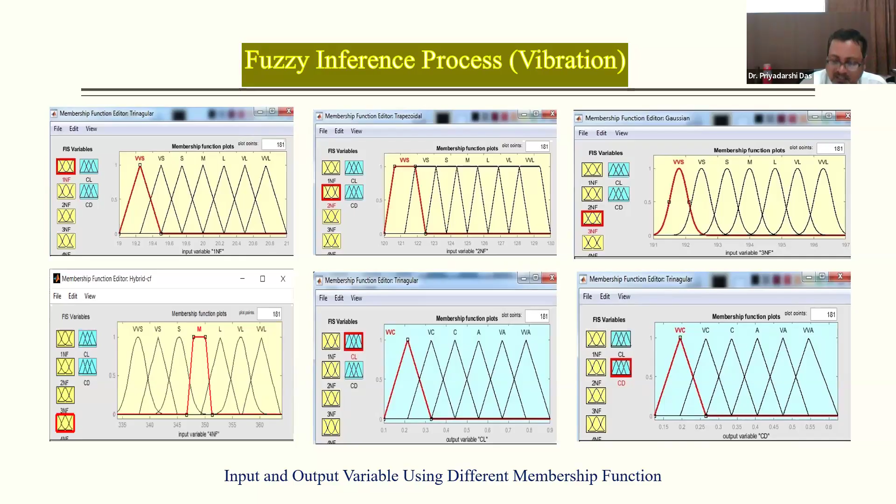So this is the fuzzy inference process for buckling. Here we have used the hybrid membership function. We can clearly see that for buckling load 1, 2, 3, 4, we have used the triangular membership function, the Gaussian membership function, and the trapezoidal membership function. Combining all those membership functions, the output is also a combination of triangular, Gaussian, and trapezoidal, which gives the crack location and crack depth.

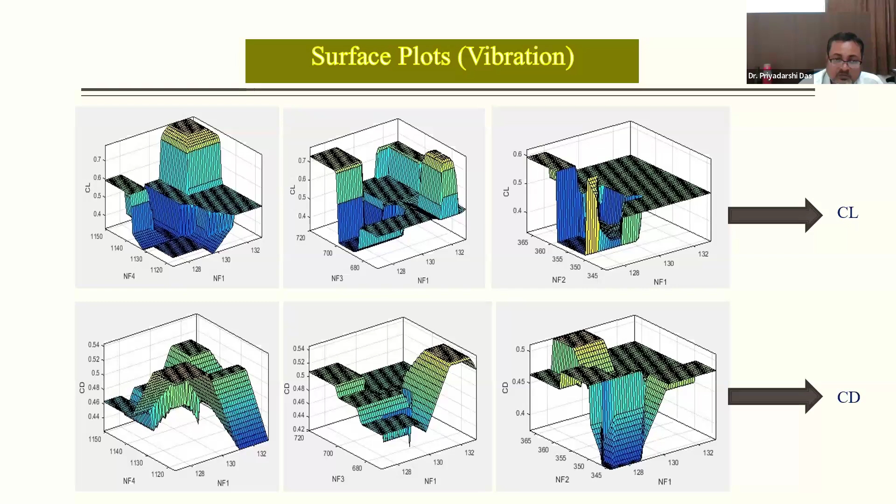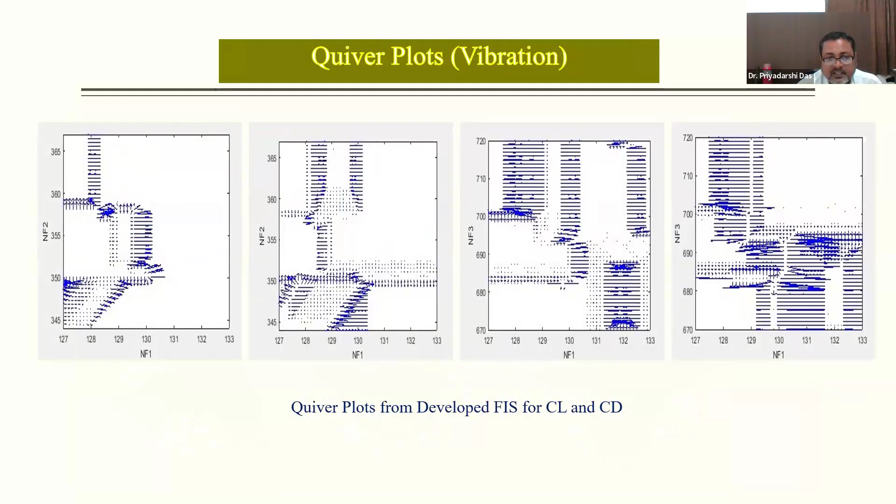So these are the quiver plots. What is the basic quiver plot? It is the direction and magnitude of fuzzy inferred decision gradients. It provides the direction and magnitude of the fuzzy inferred decision gradients. So we can see here the quiver plots.

For the stable region, it is there for direction change. We can see from the three zones highlighted: the high sensitive region, direction change transition zone, and stable region. From beginning, natural frequency 345 to 350, we can say this is a stable region.

After 350 Hertz, the direction change transition zones are there, meaning severe cracks have been experienced. After 360 Hertz, we experience a distorted figure that enables the reader to identify that there is severity of the crack, meaning the depth of the crack is increasing or the location of the crack is shifting.

Similarly, this is understood for natural frequency 1 against natural frequency 2. We can generate quiver plots for natural frequency 1 to 3, natural frequency 1 to 4, and natural frequency 2 to 3, 3 to 4, like that. The number of permutation combinations can be applied and a number of figures can be presented for the quiver plots.

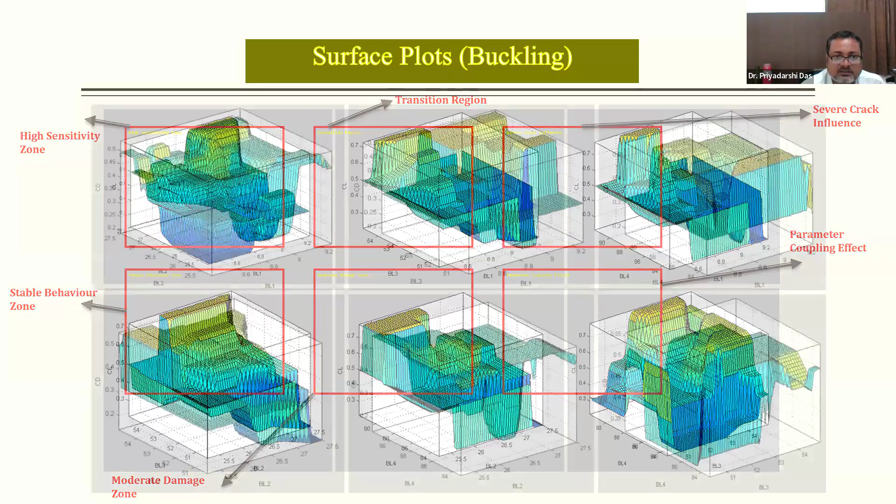You can find all such combinations there. For all such combinations, the number of rules can generate such figures. So these are the surface buckling plots also: buckling load 1-2, 1-3, 1-4, then 3-4, 2-4, then 2-3.

That is for the crack location. This is for the crack depth. And here we have found the HSB mesh plots.

The HSB color map is actually used to encode the increasing crack severity, from blue, green, yellow to red. The rapid change of color indicates the highly sensitive regions, where small changes in the beam geometry can be strongly felt, strongly realized.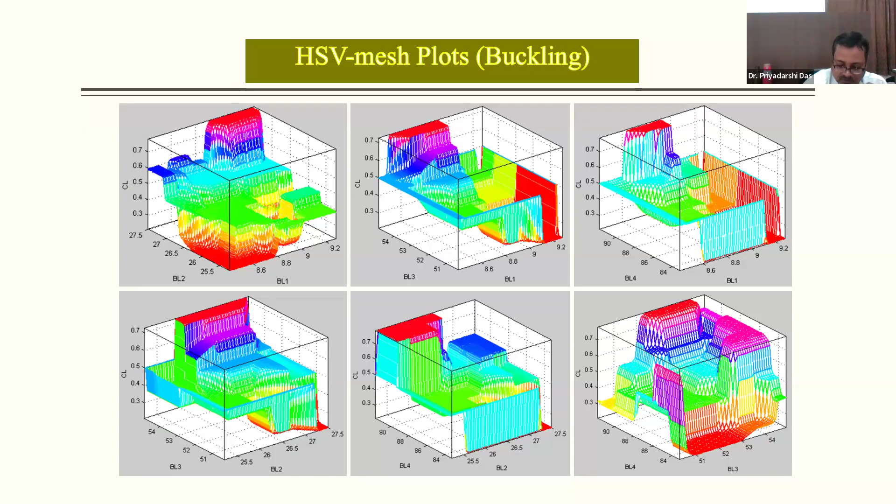So we're explaining that from this region, we can say this is the highly crack level zone, meaning the red portion is quite high. Wherever the red portion is quite high, it can be realized that the crack severity is more.

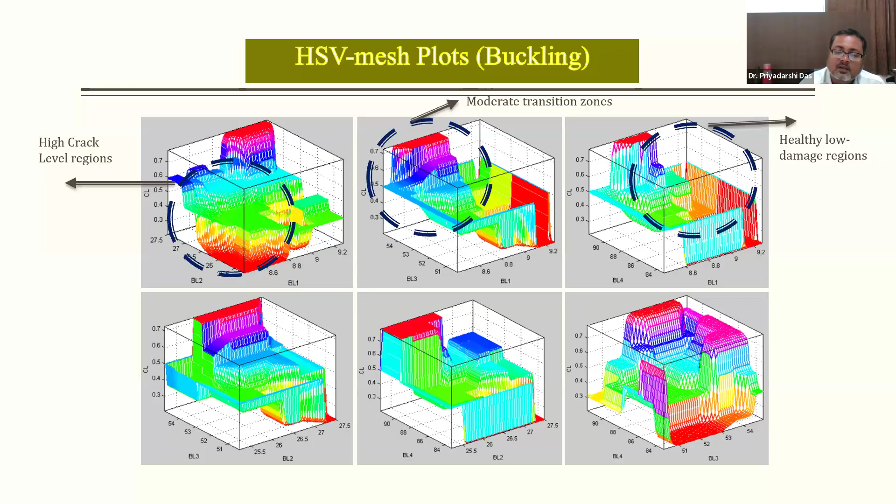Then this is the moderate transition zone, where blue and green colors are more visible, or blue colors are more eminent. Here we can say the healthy low damage region, where you find faded colors of green and red, meaning the crack propagation is very low. Here you can see sharp nonlinear rule switch boundaries.

Here are the strong parameter interaction areas, and here you can find the stable low sensitivity zones. So in this way, the HSV mesh plots can define the sharp color edges or boundaries that represent the rule switching behavior that demonstrates the fuzzy if-then rule.

If the crack location zone corresponds to the geometrical configuration associated with stiffness degradation, then from that fuzzy logic we can clearly feel how the stiffness is degraded, and through that stiffness, how the structure is affected with the implication of cracks. In this way, we can find the position of the crack and the depth of the crack.

That means the crack severity towards its position and towards its depth can be realized. So this is the HSV mesh plot for the crack depth, and this is for the crack location. In the similar way, we can find the severity, or sensitivity, of the crack.

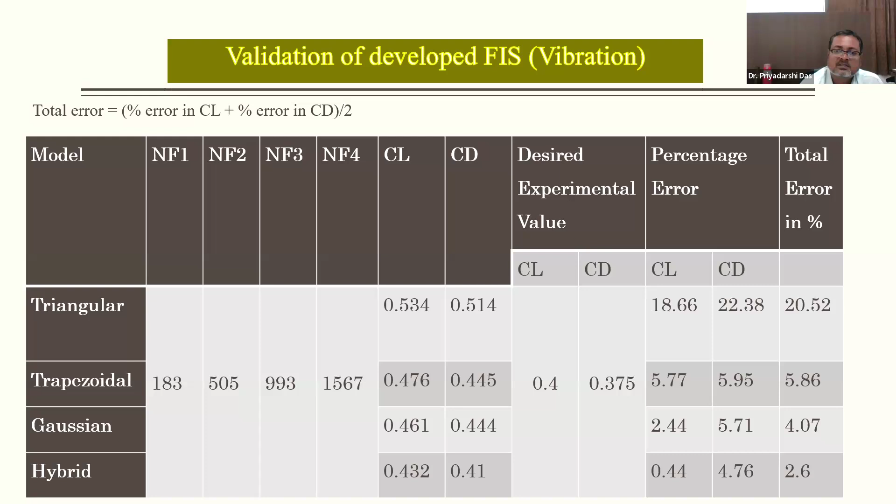This is the validation of the developed model with the experimental value, and the percentage of error we can find for the triangular membership function. Using the vibration data, the percentage of error is 20%. For trapezoidal, it is 5.8%. For Gaussian, it is 4.07%. And for hybrid, it is 2.6%. This means using the hybrid membership function effectively produces the closest resemblance to the experimental value.

Now, the buckling loads are also provided as input parameters, and it is validated against the experimental value. For triangular, it is 18.13. For trapezoidal, it is 7.6 - there is a sharp decrease. For Gaussian, it is 2.67; the Gaussian membership function itself governs very crisp results.

And for hybrid, it is 0.9, which is most close to the experimental value. So the developed model, through experimental validation, has attained robustness, or we can say that the precision is quite high.

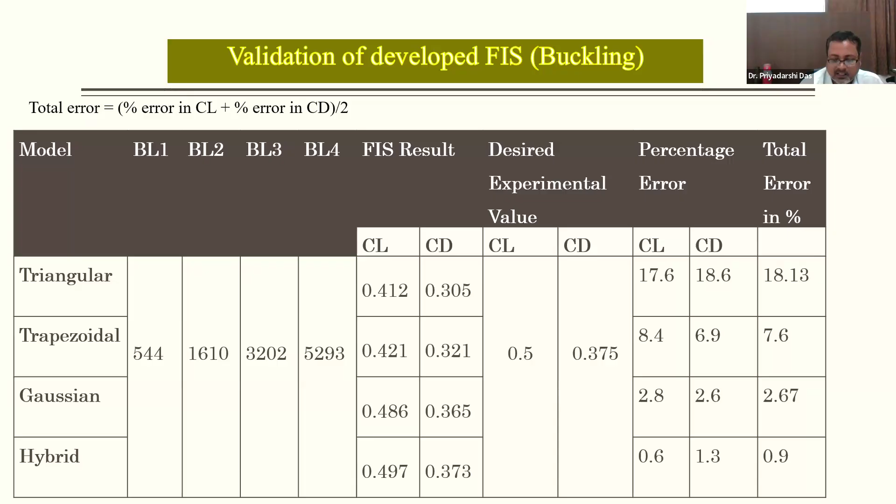So what are the advantages of fuzzy logic in crack detection? It is robust to noise. As I said, it handles noisy and incomplete image data effectively—be it image data, vibration data, or structural data, it handles all effectively.

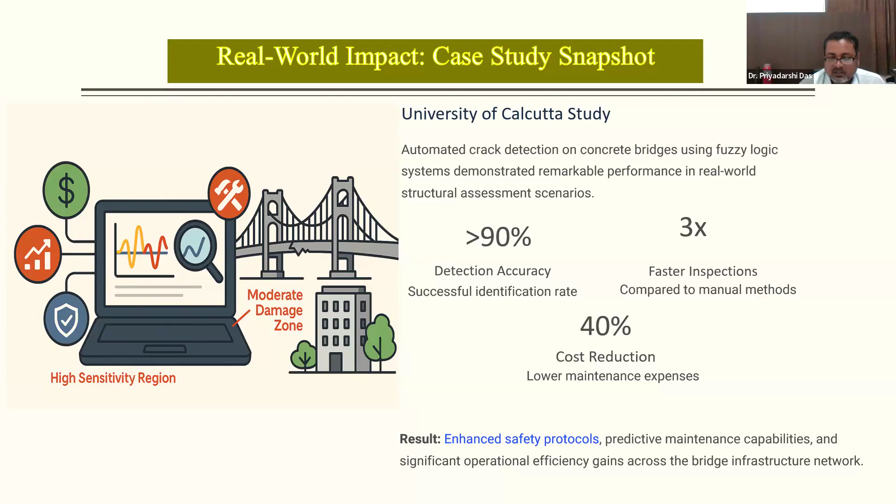A case study from University of Calcutta shows that the crack detection accuracy is greater than 90%, with 3x faster inspection compared to manual methods, and 40% cost reduction in maintenance expenses. This results in enhanced safety protocols, predictive maintenance capabilities, and significant operational efficiency across the bridge infrastructure network.

So the concluding remarks: fuzzy logic empowers smarter crack detection. It acts like human-like intelligence. It provides reliable assessment, and it is a next-gen technology.

A lot needs to be explored through fuzzy logic, especially in laminated composites, which is mostly an untouched area. Different types of data can be integrated—like I have integrated buckling data. Both vibration and buckling data combined can also be integrated. Different methods are also available.

I have used only the Mamdani FIS. There is also a Sugeno FIS where data needs to be input, and the output is generated automatically. Here we have to produce the output data by defuzzification—it will defuzzify the data immediately and produce it automatically. That is the Sugeno technique, which is more efficient.

Then integrating fuzzy logic with genetic algorithms, and with artificial neural networks—already some people are working on this, that is ANFIS. Integrating fuzzy logic with other AI techniques such as deep learning and machine learning will produce a more robust method or technology for structural health monitoring. Today structural health monitoring carries a lot of importance, and when it comes to laminated composites, it is certainly most important.

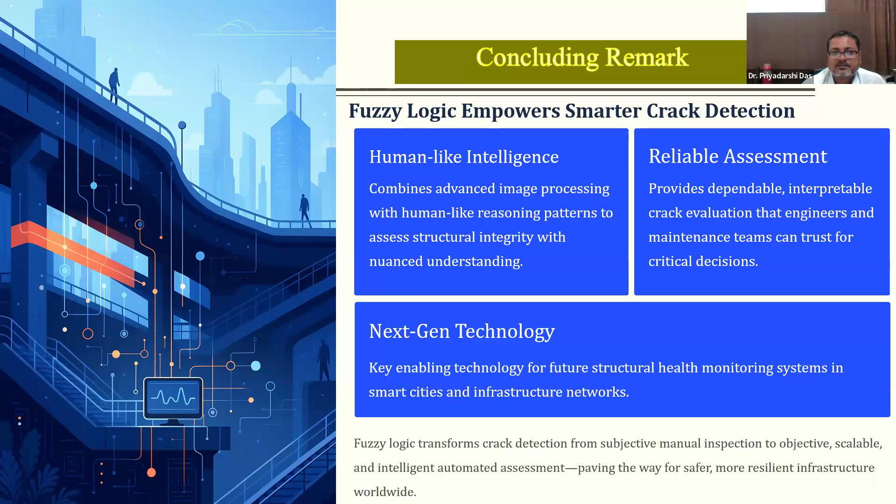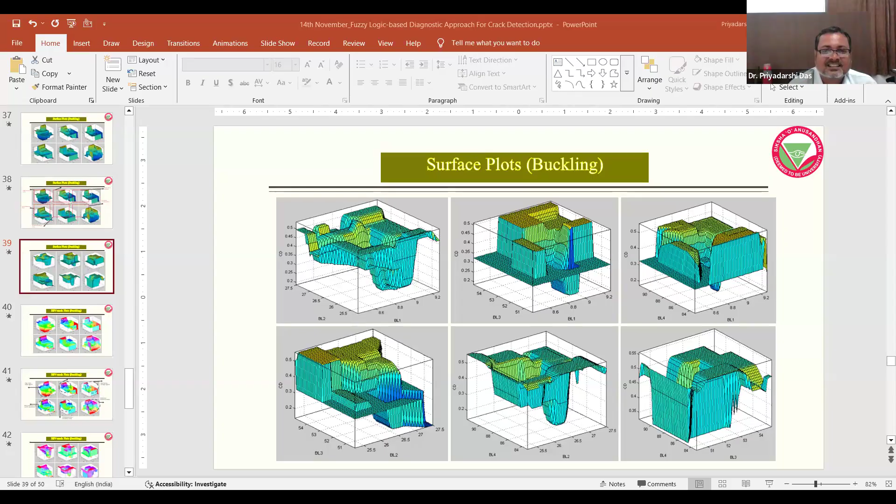And sir, I need to thank Ansuman and Mosumi also, because they suggested that our teacher is very interested to share his view in this FDP program. Sir, both Mosumi and Ansuman are my students, and I really appreciate their efforts. I know both are your students, and they are very good teachers now also. Both are doing excellent jobs. Many best wishes to them, and to you also. Thank you, sir, your presentation is extremely informative.